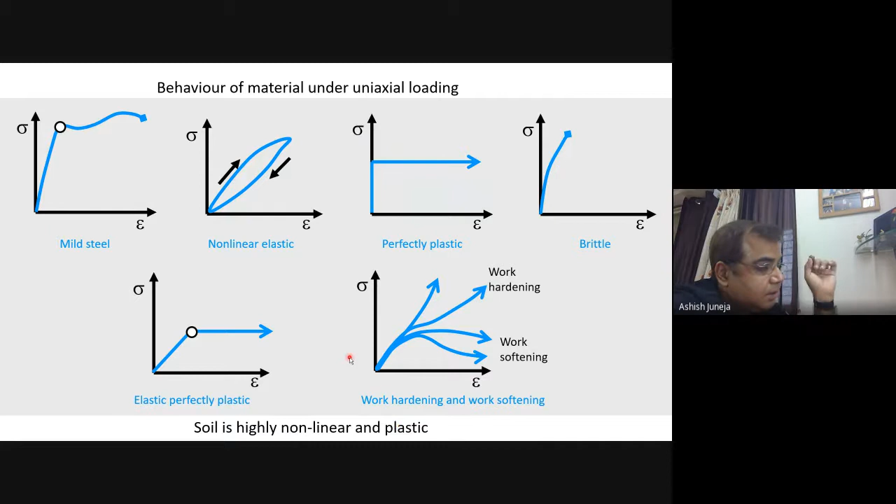As we always say, soil is highly non-linear, and it is plastic. So that's important to note - it's non-linear and plastic. That makes this material unique. There's a third point I'd like to add to non-linear and plastic, which is the stress dependency. This can be explained by a simple triaxial test.

The CD triaxial test is a consolidated drained triaxial test. If you take two samples, A and B, both samples have the same void ratio. If I plot a stress strain curve, for soil we define it in terms of deviator stress versus strain.

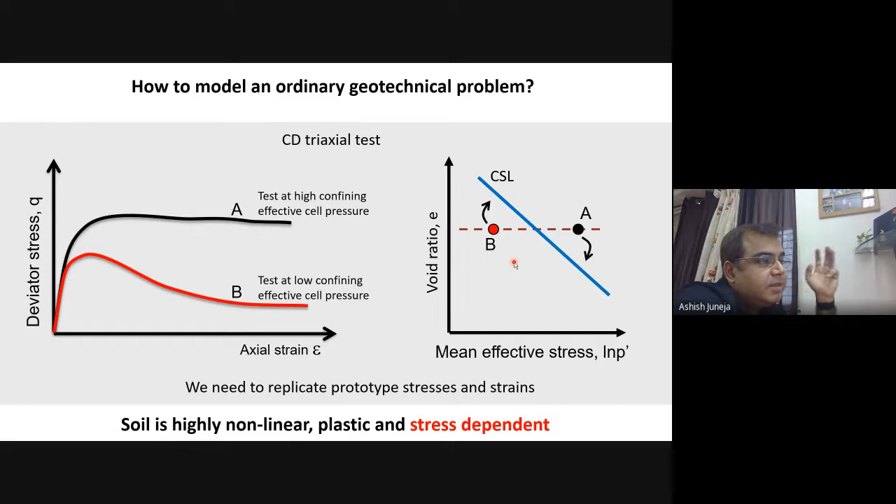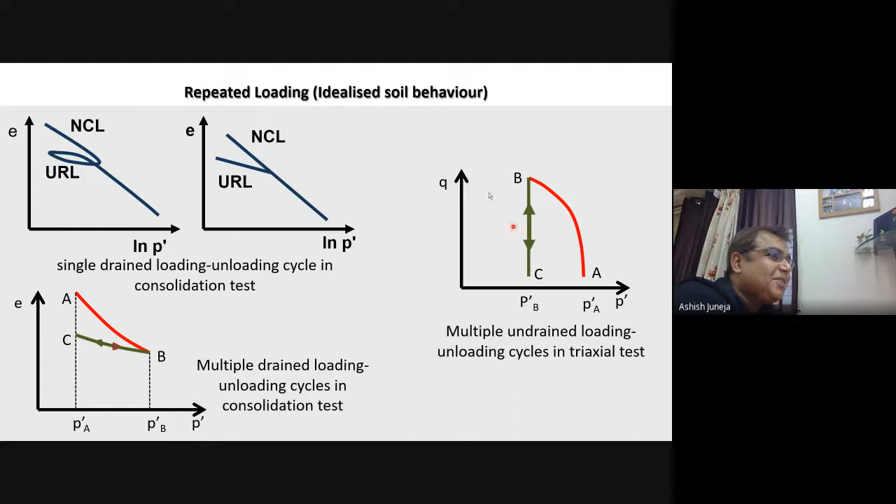So this is interesting, it means with loading I do see some response, but it reaches a certain threshold. As long as I can model that threshold, I can tell people this is the soil strength, or this is what you will achieve after, no matter how many millions of times you run the train. Once you reach a threshold, that's the level of change in the soil, whether improvement or not. That is the level of change you will get. These are the points of real observation.

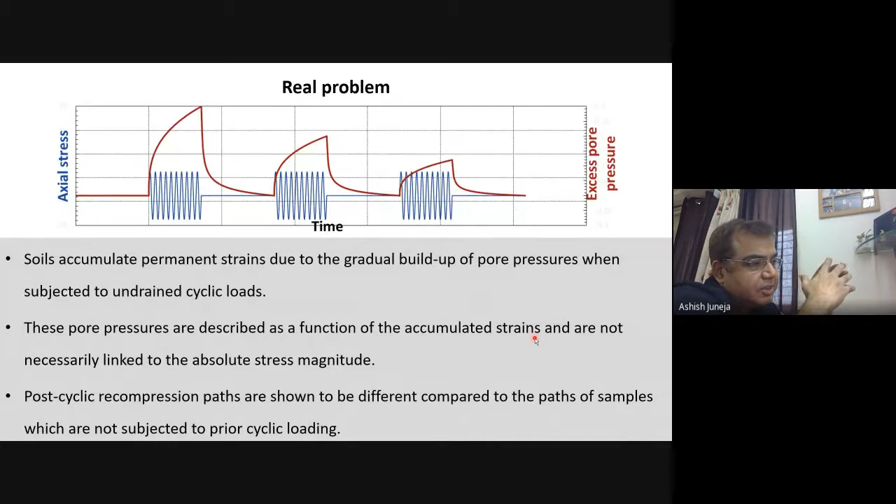The first one is the strain accumulated. Soils accumulate permanent strains due to the gradual buildup of pore pressure, that's what this figure shows. These pore pressures are described as a function of accumulated strain. In the next few slides I will show how strain accumulation has been modeled, and how pore pressure accumulation has been modeled up to now.

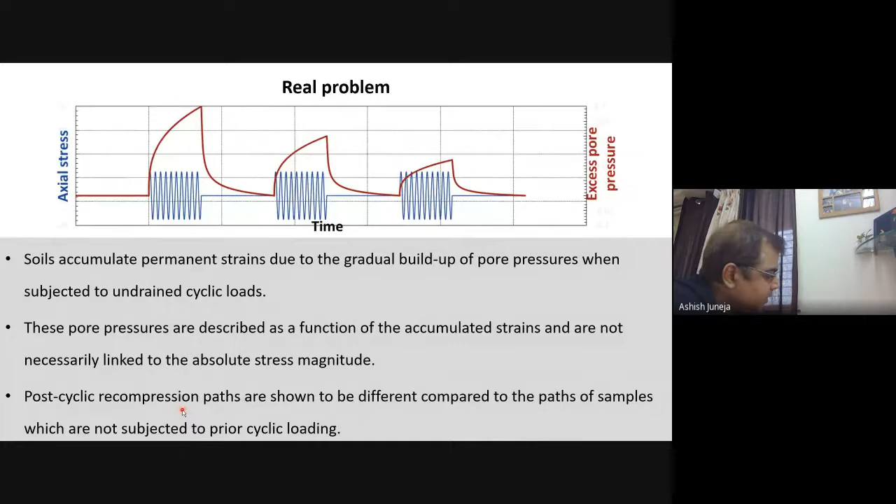The last one is recompression, which I put as the title of today's presentation. It's the last point on this bullet list, but it's one of the most important, because the first two points are in fact linked or directed towards the third one. So let's look at the response of the soil.

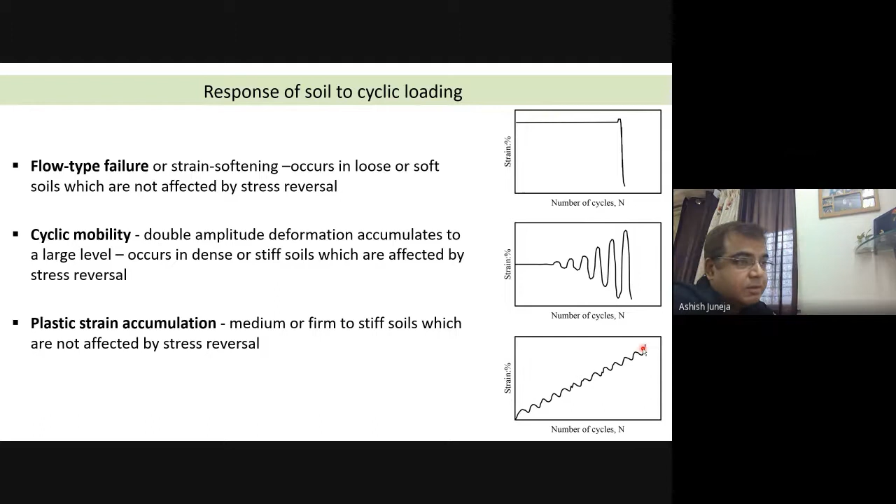This whole thing, my presentation will speak on. We will look at the pore pressure changes and stress changes, some of the degradation models which have been developed, and what happens when we have intermittent drainage in between the cyclic loading - meaning one train goes, then before the second train comes in, the pore pressure drains off gradually. So we're not going to model the train, but I'm going to model a cyclic loading on an element of soil.

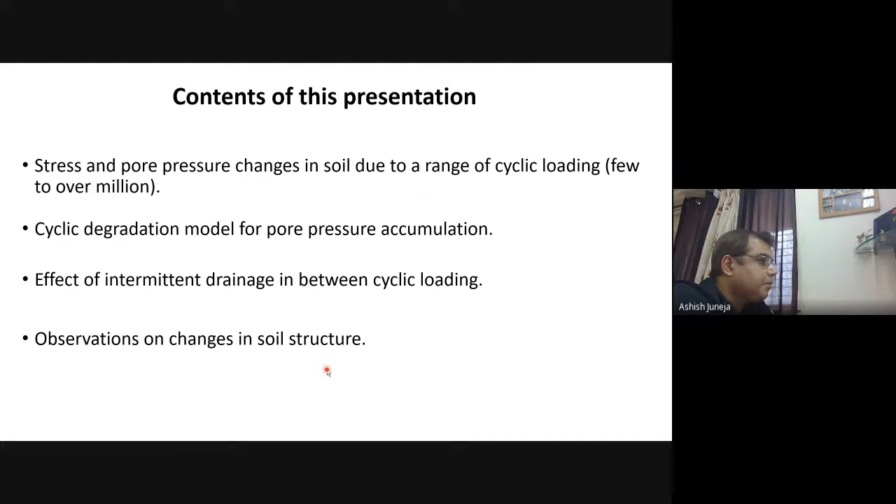Hisar, just to give you a background, is where they are coming out with a new nuclear power plant. So that's the third soil, in between. These are the 3 different soils we tested.

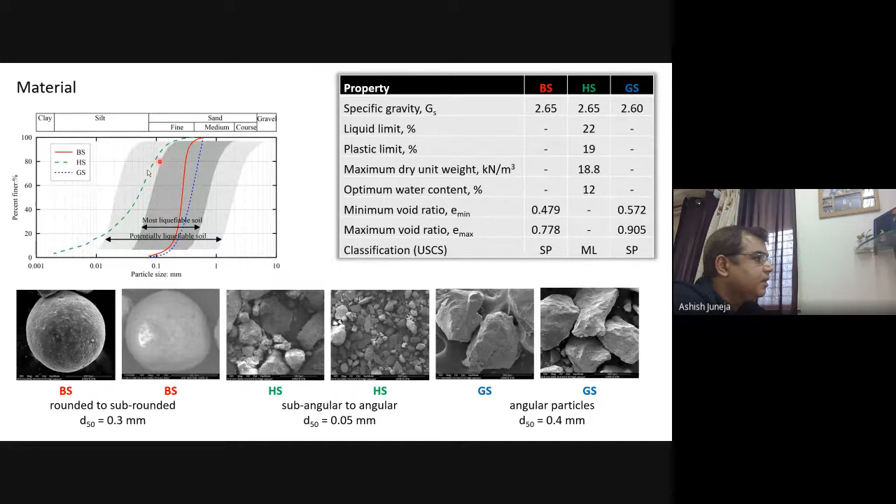All 3 soils more or less lie within the range of soils which are liquefiable. The silt lies slightly away, but nonetheless that was not the idea - liquefaction study was not the idea of this whole exercise, because you're not really looking at liquefaction. You want to model the whole state even if the soil does not liquefy.

These are photographs taken by, I think, Aslam. Aslam is a very bright student, was a very bright student. He graduated a few years back, now he's in Yonsei, I think, in Korea. I think he belongs to Trishur, if I'm not wrong. We were fortunate to have him.

This is a sample prepared by compaction, I think from a moist tamped sample. These are photographs at different stages - empty cell, this is a split mold, just a temporary support until you fill this with soil. That's filled with soil, then you put a cap, seal the cap with a tube, and apply some vacuum from the top.

This is interesting - only when you apply vacuum within the sample, even a small amount, can the sample stand on its own. You'll see in this photograph the split mold has been removed. So you visualize that - I have a leaning tower of Pisa. I think one of the attendees has a... what do you call it?

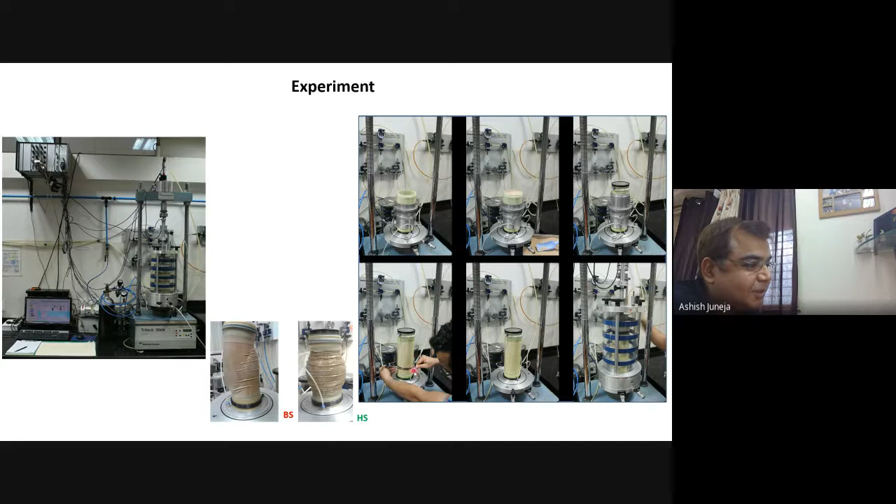DP, I think they call it. Your photograph of a leaning tower of Pisa at the back - that's again a leaning tower of Pisa, but it's made of sand, and visualize it's just standing on its own. Not many research students can make a very nice, perfectly cylindrical standing sample.

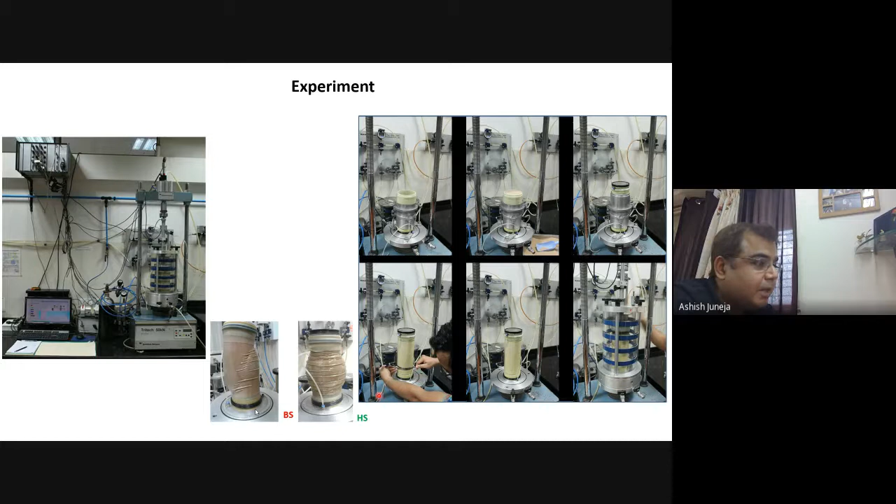So that's the first one. We also did something using pluviation - that's a pluviator, meaning you rain the sand from the top through a set of diffusers, and the diffusers are made to gradually go up as the sample is formed within this. This umbrella is just a cover so that excess sand does not enter the mold, but flows out. Any sand which falls at the border is made to flow out.

This is by another research student, Shantan - I think this is his own innovation and development. This whole setup is meant to be in a vacuum chamber, but at this stage you don't see vacuum because it's open from outside. What he also did was model this using DEM, where you have discrete rigid particles, and you can model that.

The falling of samples - remember, samples are made to fall through a set of diffusers, and the diffusers are stepwise allowed to go up as the mold gets filled out. This is again a moving video, though I don't have a copy immediately, but it's meant to show the particles as they fall.

Two points I want to highlight with this procedure: if you don't make the pluviator's set of diffusers go up, you see a void ratio difference within the sample itself - say a point over here versus a point over there. As the sample is formed, if you don't move that plate, because the plate has to move to keep the height of fall constant, you get sample non-uniformity.

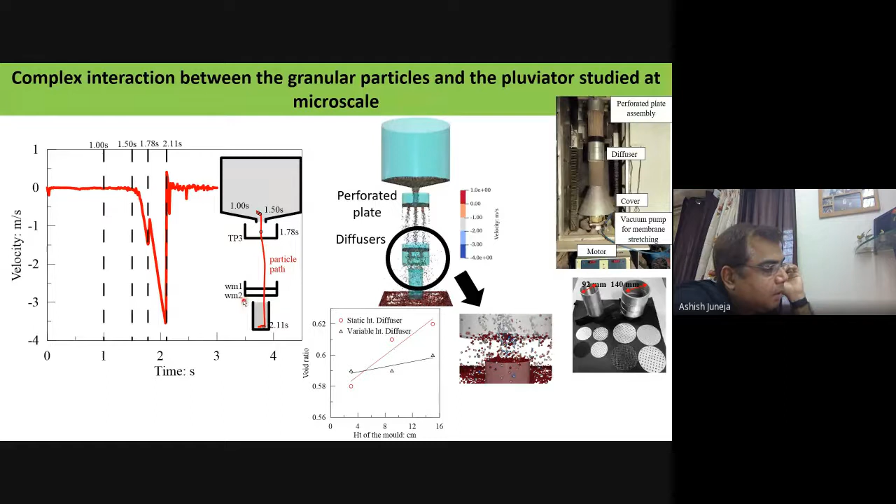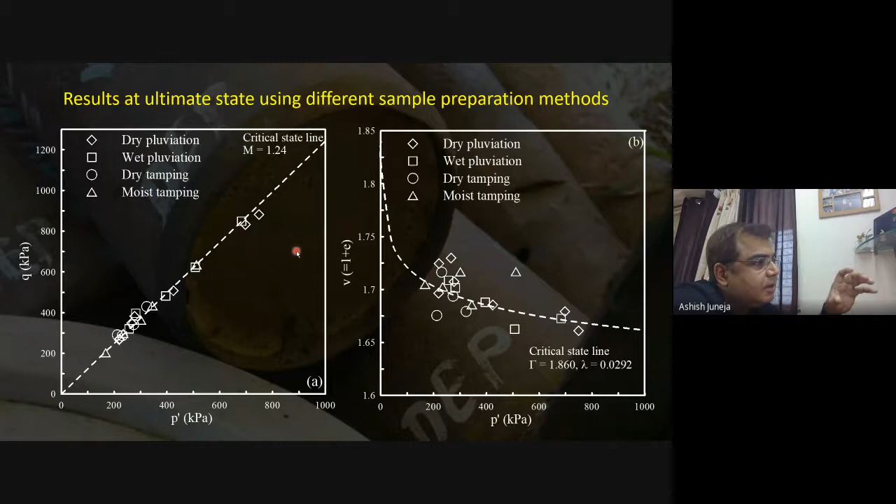So there are different methods of sample preparation, but the excellent thing is if I look at the failure line, plotted in another stress space where Q is the deviator stress and P prime is the mean stress, you see all the samples reach the same failure line, just in a different format. This tells us that no matter how you prepare the sample, the failure line is the same.

But if I make samples from pluviated samples versus a tamped sample, the difference lies in how many cycles it takes to liquefy. If you want to see whether preparation has any effect on cyclic loading, studying whether samples liquefy is interesting.

Without going too deep, the moist tamped sample mean line shows an up and down of about 5% deviation in the data. If I take the mean line, something like 2 cycles takes 0.2 CSR. CSR is your cyclic stress ratio, meaning how much load you apply - it's a normalized factor for the magnitude of cyclic loading you're applying.

It's shear stress divided by mean of original effective confining stress. Think of it as the normalized quantity of cyclic loading you're applying. It's about 0.2. Look at this, 2 cycles is definitely more than 0.2. I think this was the wrong choice, let me choose another one.

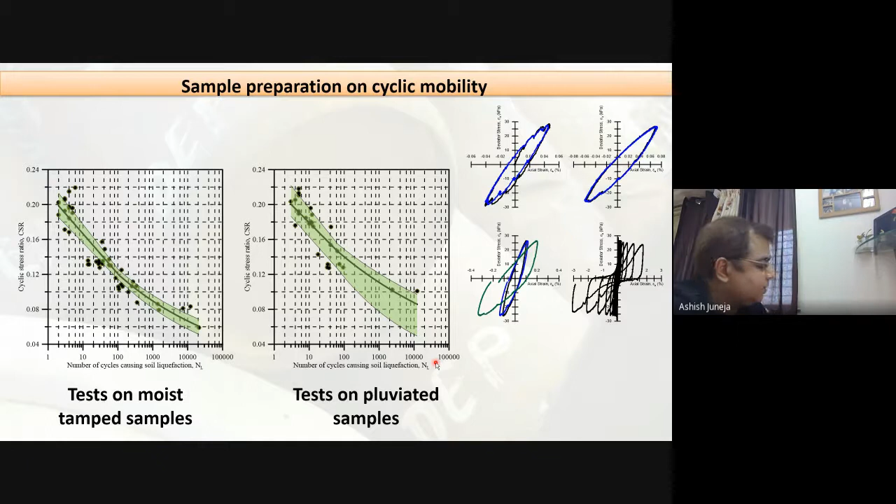If you look at the data here and there, the pluviated samples give slightly more resistance to cyclic loading. So this is one point. If somebody comes to you and says, look, I've prepared this cyclic test, I can show that my sand will not liquefy, will not fail under your structure, because at N equals 20 cycles the resistance is high, your first question should be: how did you prepare your sample? That would tell you whether the difference in sample preparation has an effect.

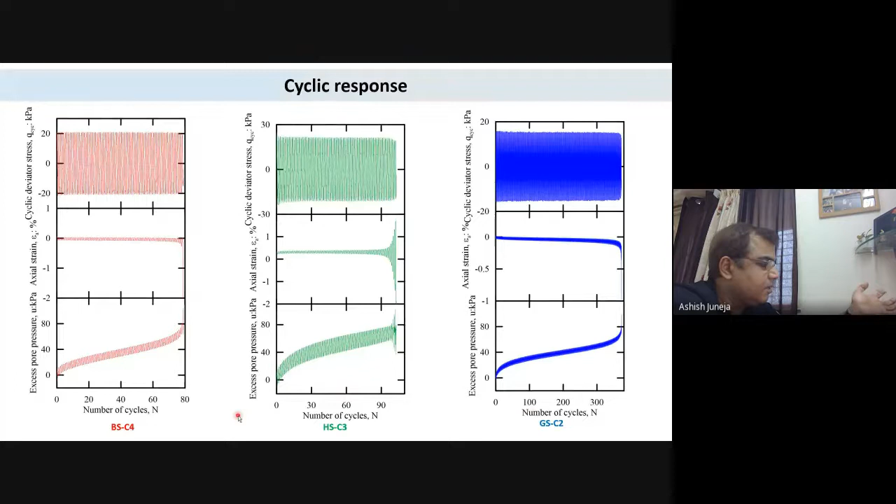So these are the 3 samples. Usually you do a load control test, plus minus 20 kPa load applied, and you measure the cyclic strains. It just goes up to there and liquefies. Pore pressure develops up to a point. Similarly the other two. These are typical tests wherein the number of cycles is not more than 100, maybe the last one has gone up to slightly above 300.

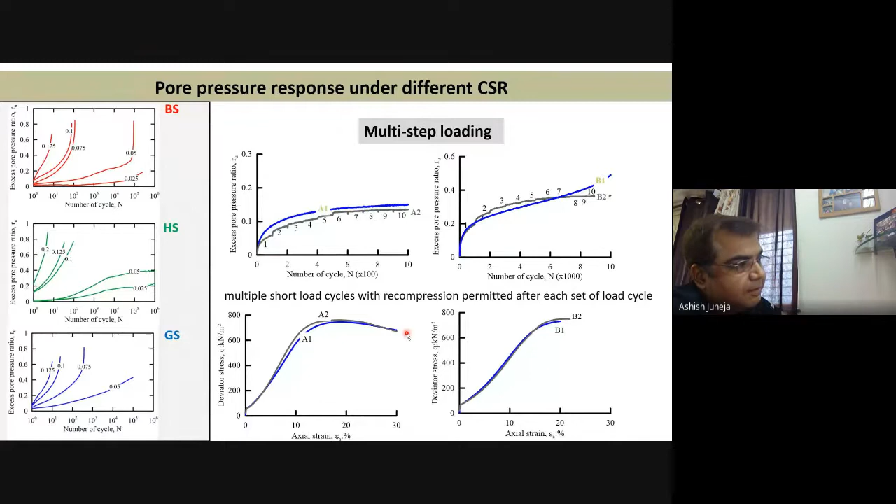So the very first prediction model we chose was from the literature, where they have a degradation parameter defined - how does the soil degrade? It's actually called degradation, but that's not a good word to use, I presume, because the soil is improving. In this case, it's not degrading, it's actually improving.

So what you do is you take the data right up to the failure, you measure the number of cycles to failure, and then you employ a parameter, curve fit the parameter such that you get a curve which matches the experimental data.

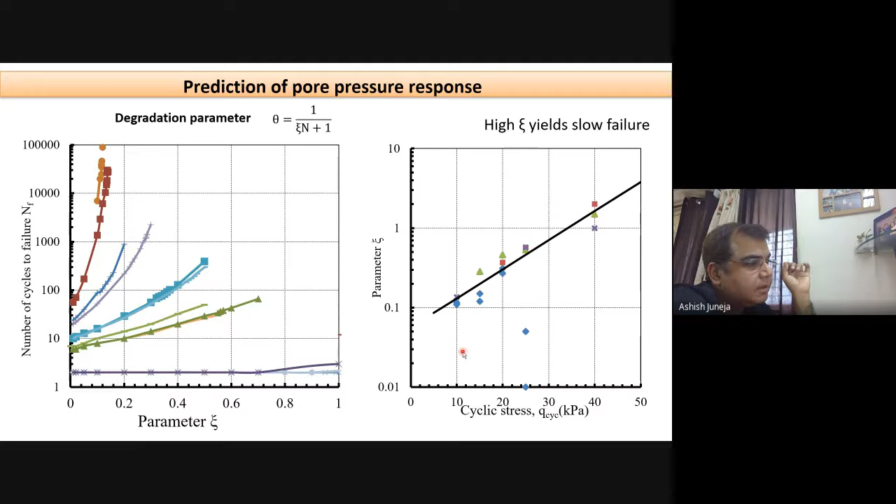So with this, we looked at whether we can model the response of the soil. These curves are the experimental data, and the straight lines are the numerical or predicted. What you have done is taken the last point of your experimental data, as from the previous slide, where the soil failed, and the starting point, and connected it using a hyperbolic model.

This is no good, because you're looking at only the last point, and the last point can tell an entirely different story. It cannot even tell you what the story would be in between. So all these curves show that you are able to match the last point, but you can't really do much about the in-between. You see that for all three samples, the prediction really goes wrong.

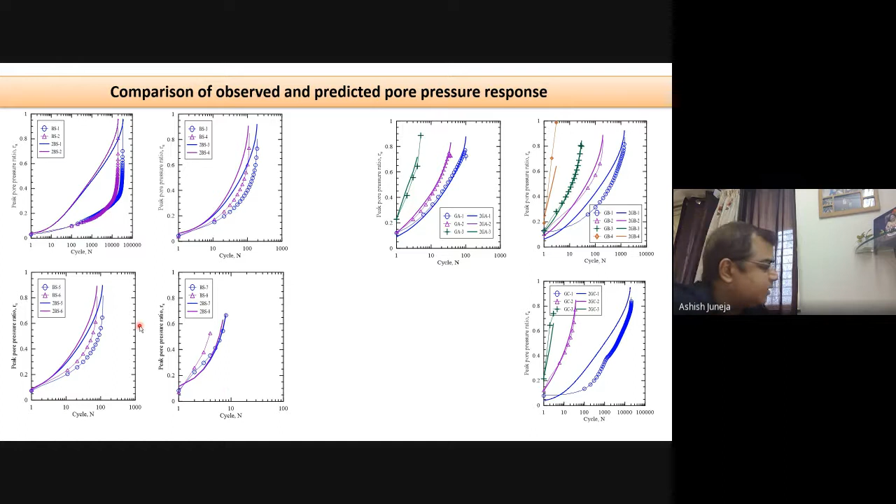So the other model, other than hyperbolic, is the power model. The power model is reasonably better, I would say. It's better, but at higher number of cycles, it's not able to predict the tapering of the pore pressure, how much the pore pressure increases.

I think I did not introduce RU. RU is again a normalized pore pressure, called the excess pore pressure ratio. So when RU is 1, it means it balances the effective stress, so your soil has failed. So that's again just the excess pore pressure, but as a normalized factor.

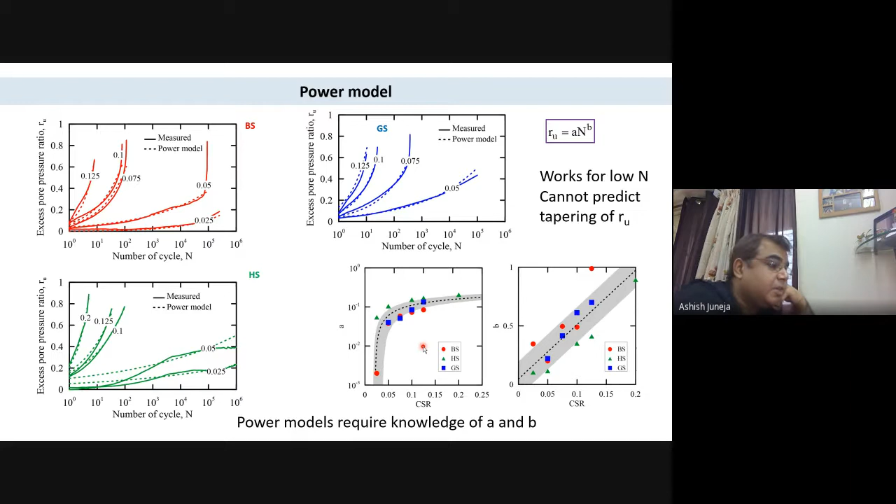So it has two variables, A and B. You fit your soil and see how A and B come out. But in our case, we were fortunate to see that A and B were independent of the soil type, because irrespective of soil type, A and B are the same. But nonetheless, you're not getting a perfect match.

So then comes the slightly revised hyperbolic model, which is an improvement. This is again, I think, work that Nee and others did. They tried, like in mathematics, where you have a curve and want to model the shape of the curve without thinking about why this shape came about in the first place. So it's just trying to model the shape.

There are a number of these models, and even this one, I would say, didn't work very well. I'll give you some background in the next minute or two on this. I need to tell you what this is about.

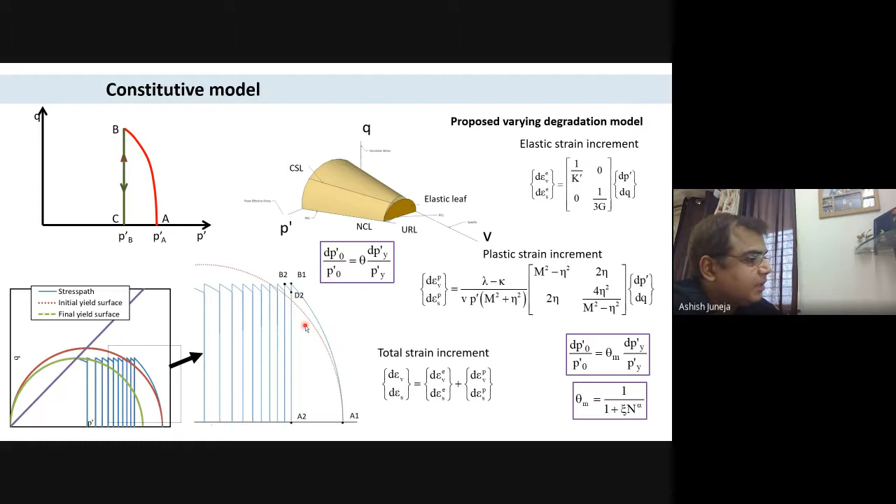This adjustment of theta is helpful to make it go left instead of up and down. When theta equals 0, it just goes up and down. When theta equals 1, that's the extreme case. It won't go the same path, but it'll go to a new path somewhere here.

Similarly, that's another representation of the same figure, but this time in deviator stress versus P prime. The left one is your void ratio, but this time instead of void ratio, it's written as V, specific volume, but it's more or less the same.

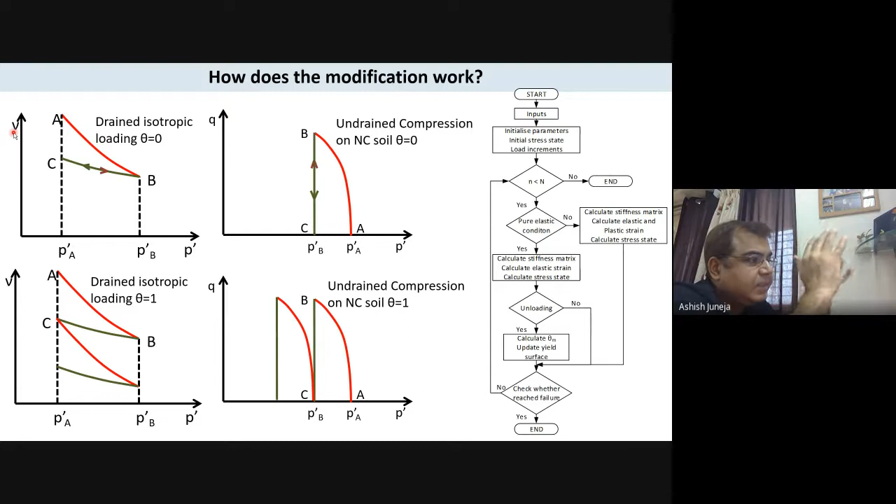So what we did was we adjusted theta between 0 and 1. This whole thing was done by Carter et al. in 1982, first time. Carter used a fixed value of theta, and he did a lot of tests on clay. For clay, I think he gave a theta of, I don't remember, 0.5 or something, but he used a fixed value.

What we did was we also took the fixed value and saw if we can plot this. Those figures are not shown here, but taking a fixed value, we got a very different result. The prediction was very different. So we took a variable theta in terms of the cyclic stress ratio, how much cyclic load you're applying. Theta was made to vary with CSR, and we saw that there's a relation between CSR and theta.

For all three soils, there was a range. We took that value and saw how the curve fits in. All these broken lines are the fit curves by Carter, and the continuous line is the experimental data. For some curves, you see a slightly reasonable match, but there is again a big offset.

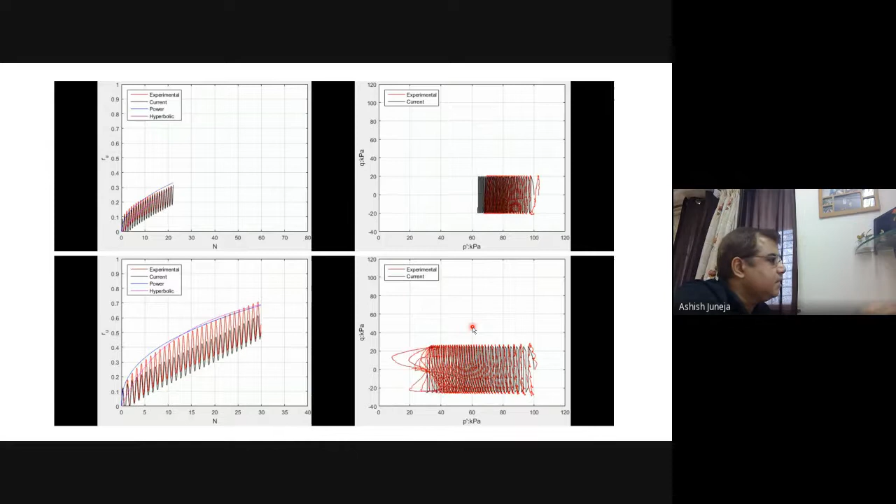Look at this curve, it's a big offset. These two curves taper horizontally, but these curves go straight up. Big offset. This animation is a nice animation—if you look at the top curve, experimental is red, and the Carter et al. adjustment is black. You'll find there is a difference, showing how the pore pressure develops with cyclic loading.

This shows a good animation, I'll just skip this. I think I have another 5 or 10 minutes. Maybe I'll just go to our next point.

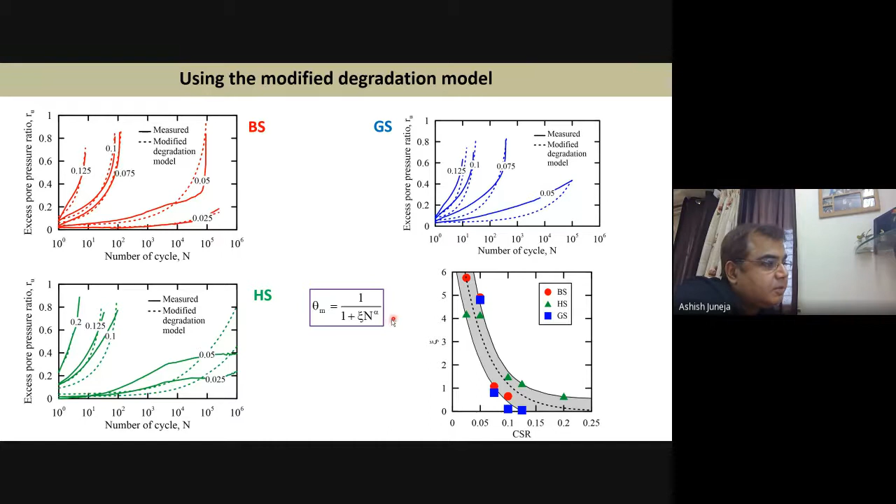So we did this so-called adjustment to bring this thing down, and it was again based on the CSR. This was slightly modified. Now this is again a theta mobilized, or I would say the degradation parameter, which is modified to bring in the effect of both CSR as well as another coefficient alpha. The alpha is shown to be dependent on the soil type—I'll probably skip this—meaning whether the particles are rounded or angular.

Now there is a limitation to this, and I just want you to look at these 2 points at the bottom: despite so much, it cannot predict the phase transformation. This is interesting, and many people who work with soil dynamics will understand that when you are about to reach failure, the phase of the soil transforms. Meaning, if you have a dense soil, the behavior in the last few cycles will be similar to a soil which has a more compressible behavior rather than a dilatant behavior.

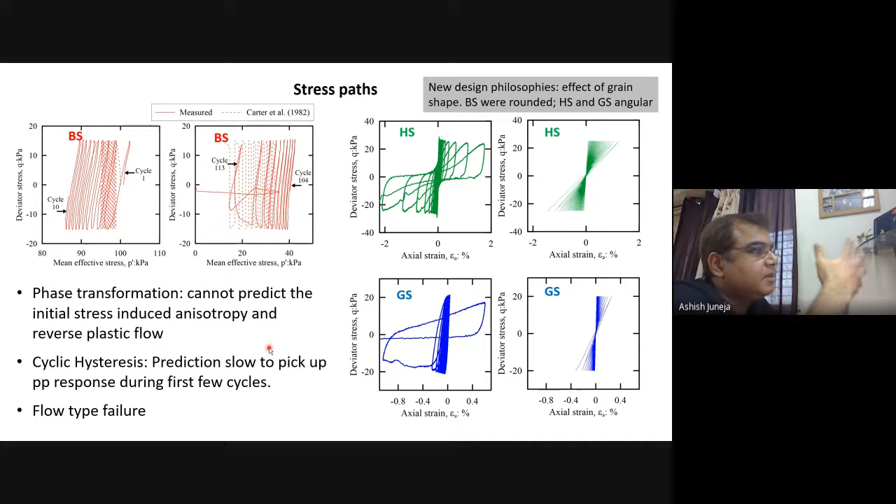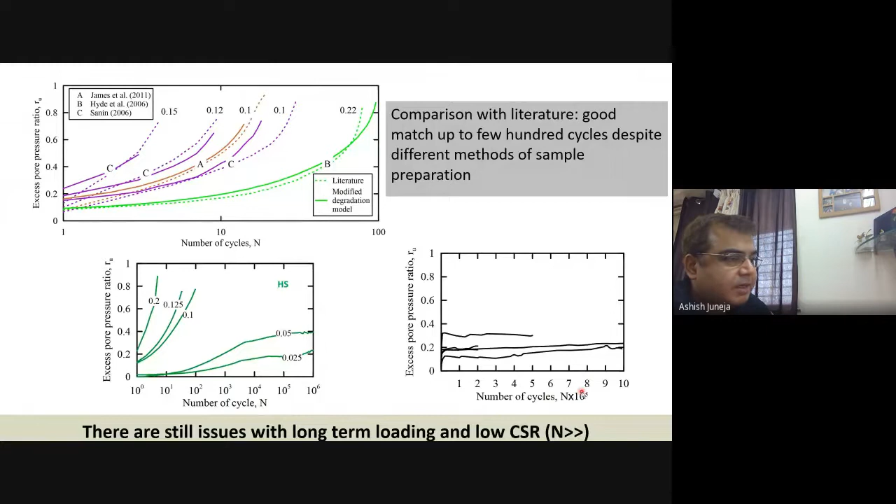So that cannot be modeled even with this kind of approach, because it requires some sophistication, and you're not able to do it. With this modification, we saw that even with literature, you could see some amount of matching, but the matching was only up to a small number of cycles. No matter when you do a large number of cycles, look at it, you're not able to get a match.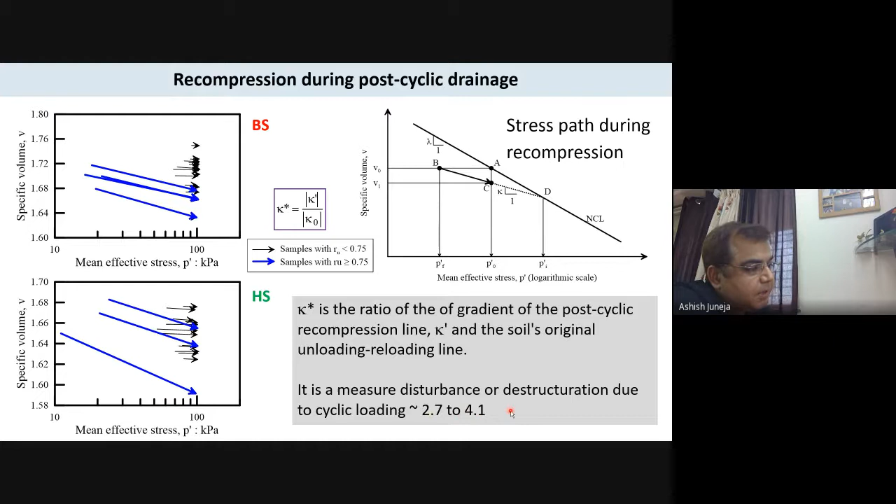So this is again unloading, we call this kappa, and this is interesting. This change can be even up to over 2 to 4 times the original value. So if you can fit in a curve with this change, I have the new mean stress versus the old stress. This is interesting, new stress, I can fit in with this change. This is the change formula which we have. Don't look at the numbers, but just see I can get the new mean stress.

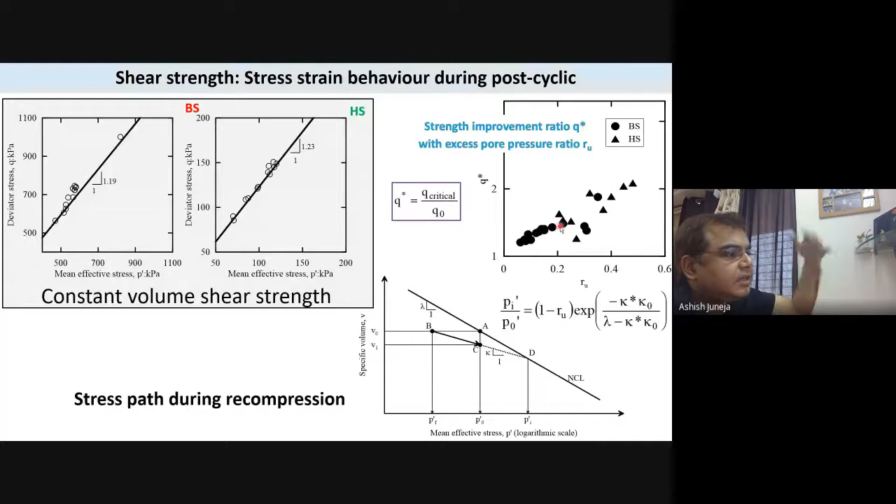That's the interesting point, and the increase in the shear strength. So this is 1 times increase, this is 2 times increase, and so on. For different curves, I get how much is the strength increase. Somewhere over here, if you look at the left hand side curves, for pore pressure increase less than 0.75, you see about 40, slightly above 40%, strength increase, even when my mean stress just changes by about 10%. Similarly, for silt, I get close to double, my strength becomes double due to cyclic loading, even with a small change in the mean stress.

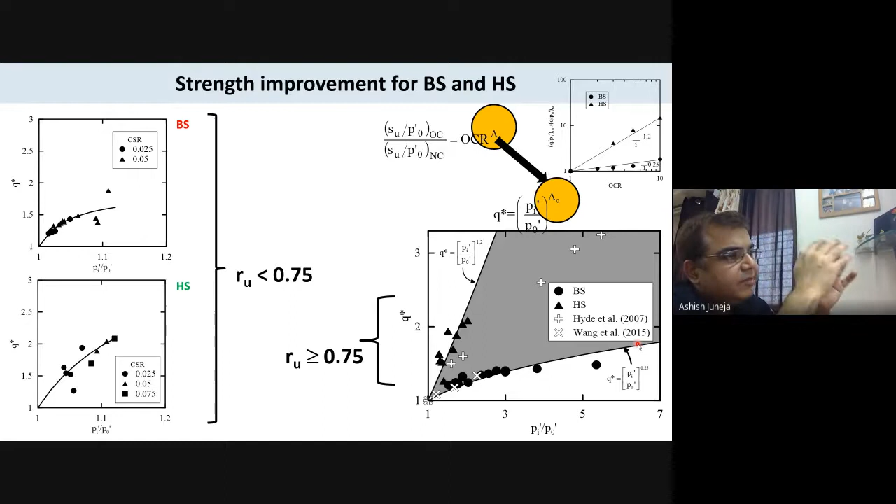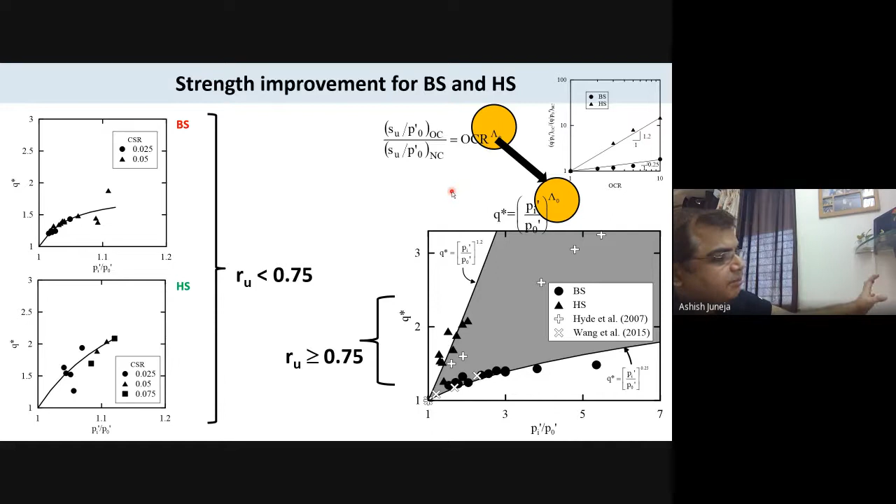So there's a factor over here which you get from your standard laboratory test. The figure on the right, don't get bogged down, but it just tries to tell you all this increase. Even if I don't have a cyclic triaxial system with me, I can't do this. If I don't have a good research student, I still can have a routine laboratory test. So these are from routine laboratory tests, and I can still predict what will be my strength increase. So I have over here the increase in the stiffness, and again, the same procedure is followed to obtain the increase in stiffness.

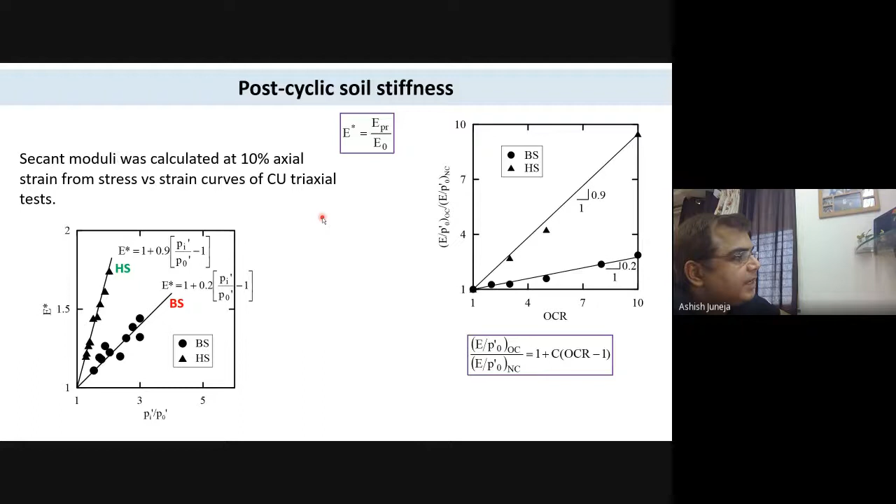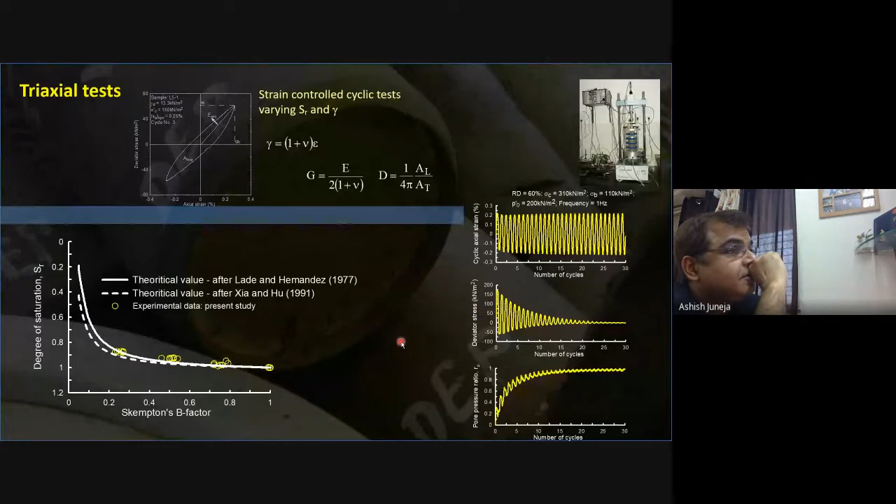If I move on to the next slide, this is something which was different. I thought if I have time, I will introduce this, but I think I'm close to my 70, 80 minutes. So I'm just going to stop and go to my last conclusion, please. I'll skip this and go to conclusion.

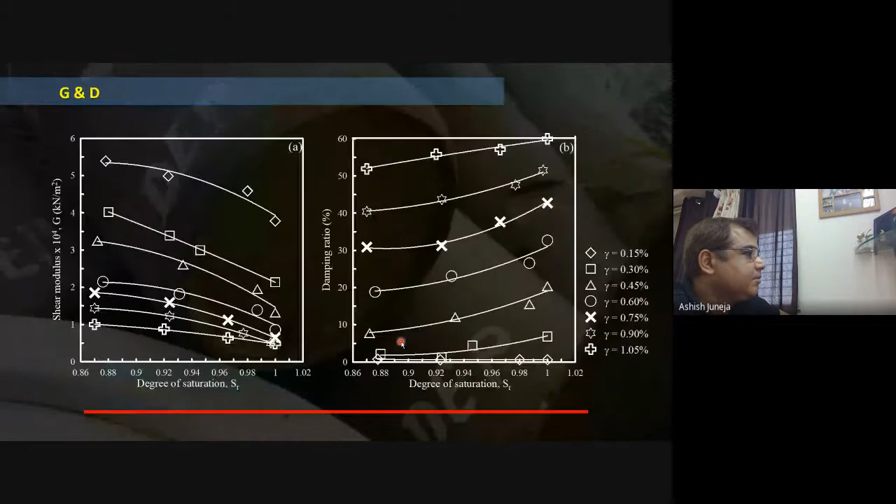The post-cyclic characteristics of the soil are significantly affected by the pore pressure. Whatever pore pressures are accumulated, your post-cyclic behavior is affected. The soil structure is disturbed because we saw a change in kappa, which is the soil property. So when you say the soil property has changed, people argue that if it has changed, then it should no longer be a property, right?

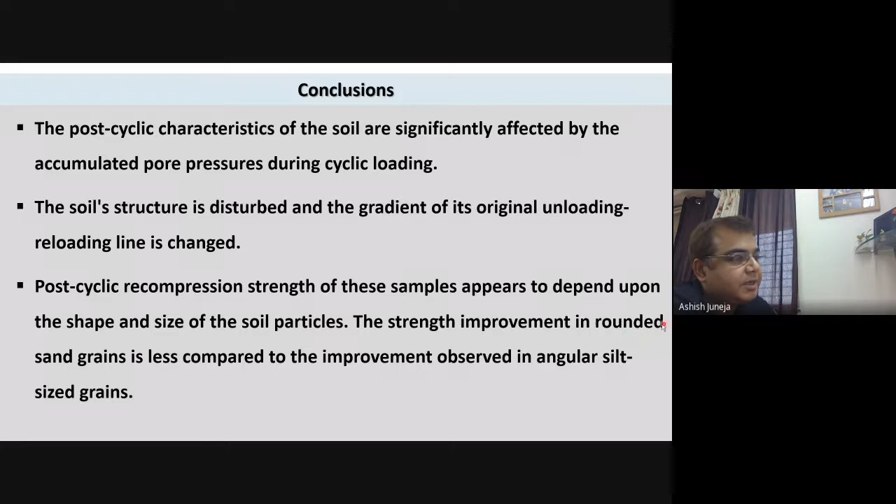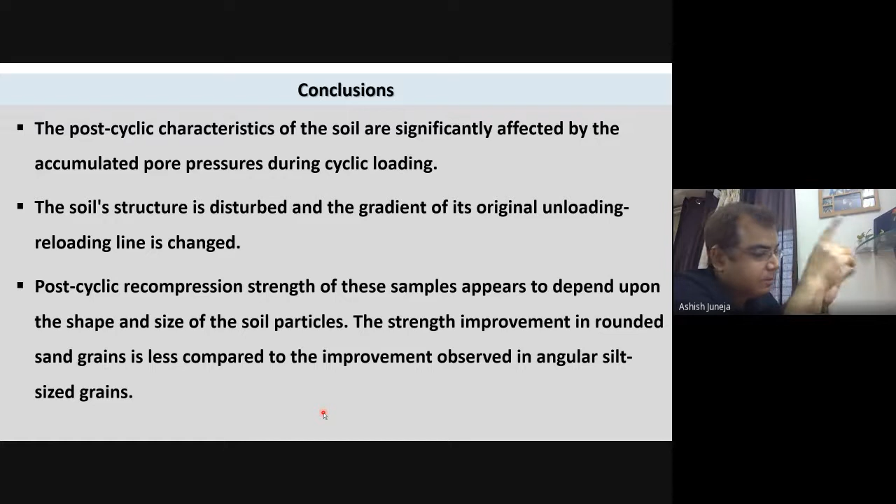The last point is that strength is affected by the shape of the particle. Rounded particles are less affected compared to angular ones, which show more effect. Even in undrained loading, the rounded particles change, they start to rotate rather than translate, but you're at constant void ratio, so the interlocking effect won't significantly change. But if I have angular particles, and it's still undrained, and they rotate, the interlocking is going to change. That is why in undrained loading, angular particles still show a large change.